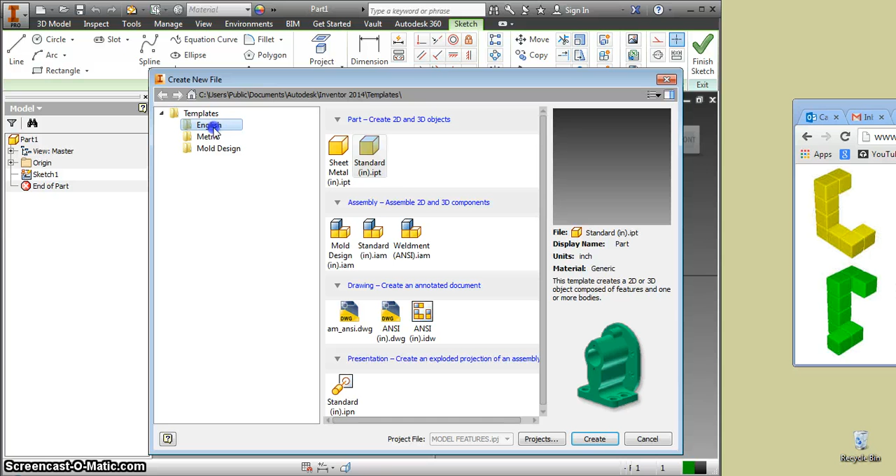So I'm going to show you how to create a more complex puzzle piece, such as this yellow one on the right hand side. So once again, we're using English and standard, and we're going to create that part.

We want to start with our 2D sketch, and we're still going to use our XY plane. So let's create this part using rectangles.

I'm going to make this long L right here, and then I'm going to add on this bottom piece. So first I'm going to make the top of my L, and then add on that bottom part.

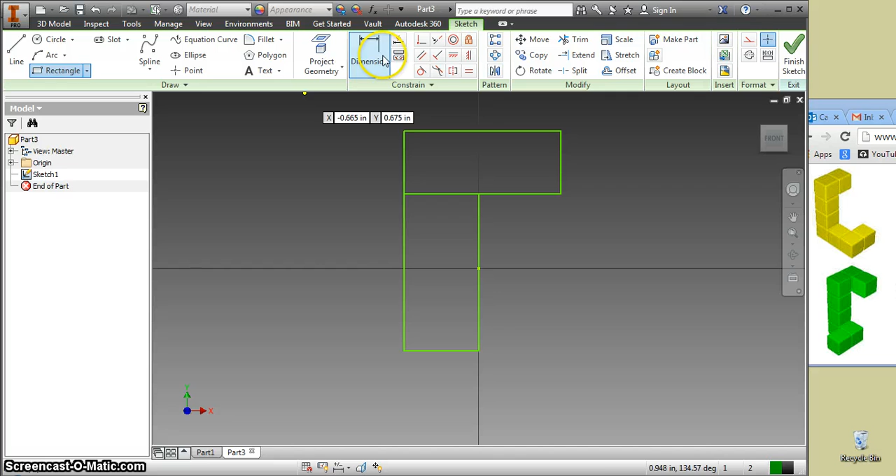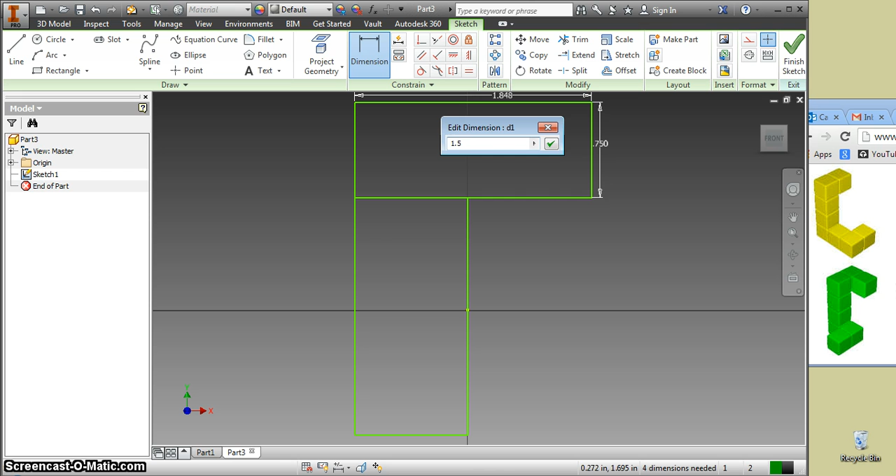I'm going to use my dimension tool. I know that this side of my L needs to be 0.75, and then I want to go back and zoom out. I know the top is 2 blocks long, so I'll click that and drag out, and that should be 1.5 or 0.75 plus 0.75.

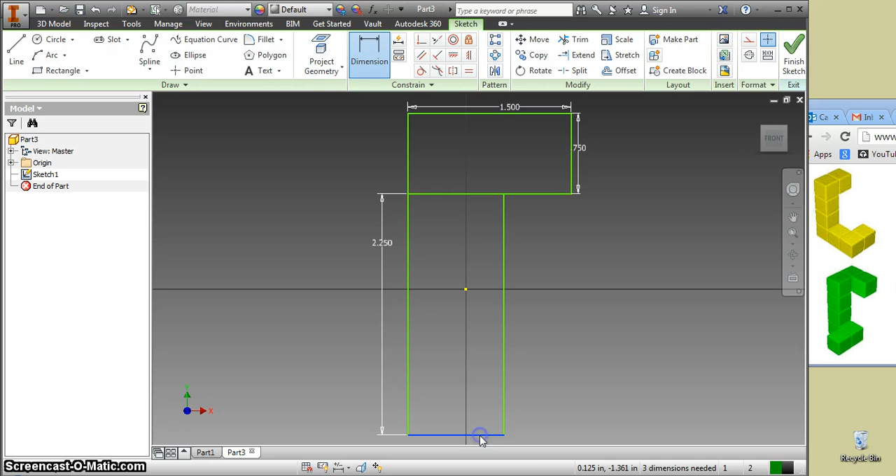Now I know that this is going to be 0.75, so that's going to be this one block. Then I have 1, 2, 3 blocks down, so this line should be 3 blocks, so 0.75 times 3. And I know that this part of my block should be 0.75.

So this is going to be my initial L. I'm going to finish that sketch because I'm all dimensioned as much as I can right now. Zoom out. I'm going to extrude that, my 0.75 inches.

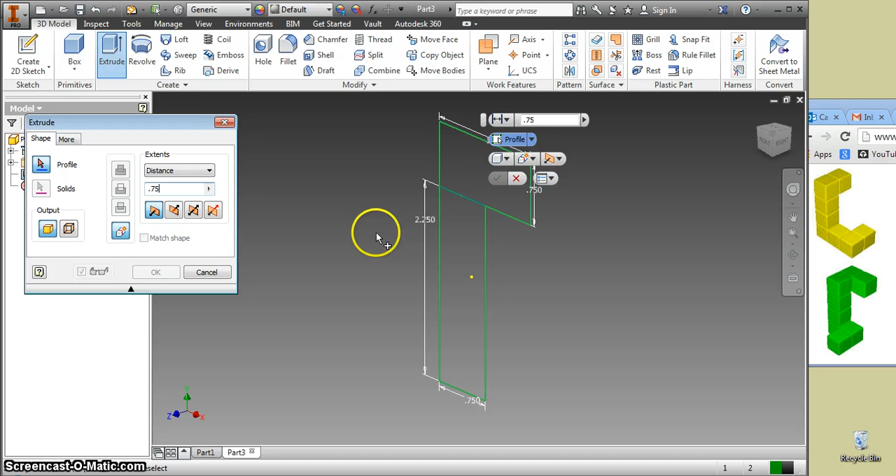And I want to extrude this and this. Once I have the front of this L, I can now add on this bottom part.

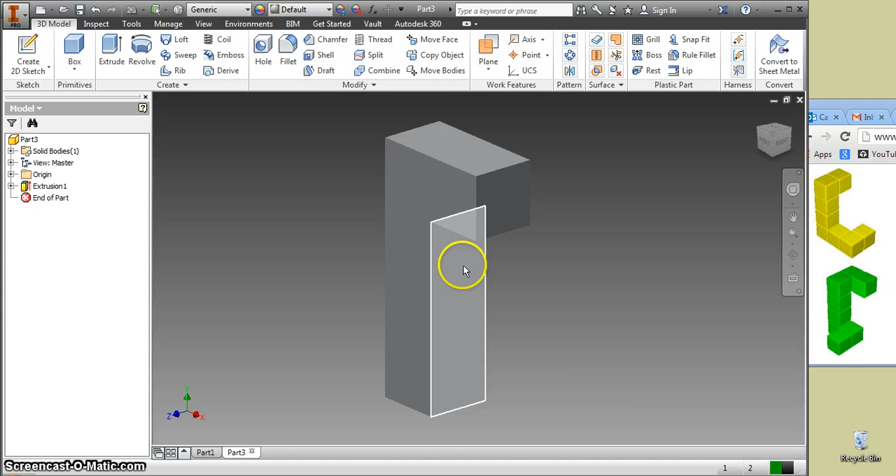So first, I can't add on it coming out in 2 different directions at the same time. So first I'm going to take these 2 front blocks, pull out one and then the other. And then after I have that, then I can add this third one on going the other way.

So first we're going to create that sketch on the front of here. We're going to make that rectangle go from this corner up, and I want to dimension it and make sure that the amount that it goes up is 0.75.

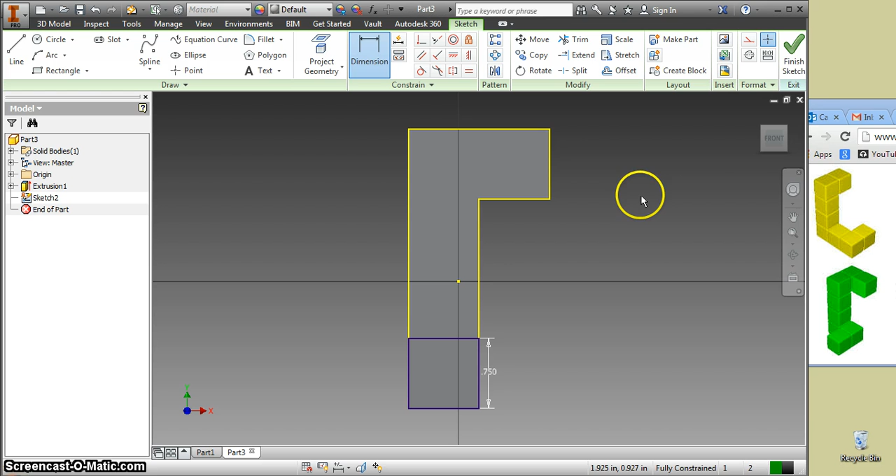And that's all I have to do so I can finish that sketch. And now I want to extrude this box, and I want to extrude it 0.75 plus 0.75. That's coming out to 2 blocks.

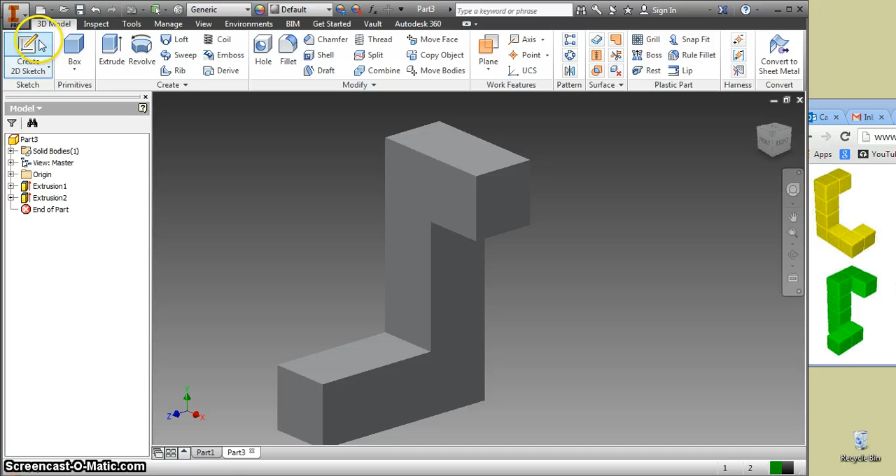And now I want this other block to come off towards me in that X direction. So I'm going to create another sketch on this portion, and I'm going to make another rectangle, and that's going to be dimensioned as 0.75 and 0.75.

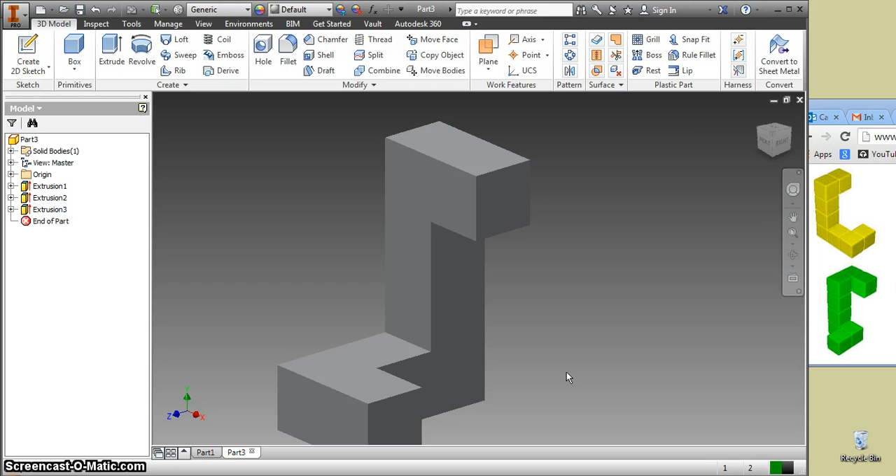I can finish that sketch and extrude this box. I only want it to come out 1 box, so just 0.75. And there we go, I have my complex puzzle part.

If I want to change the color, I can go up here and maybe I want to make this one cyan. So I have a blue puzzle part that looks just like this one.

Let's see if we have another complex part that we can make. All of these parts are made in the same way. So let's try to make this complex puzzle part.

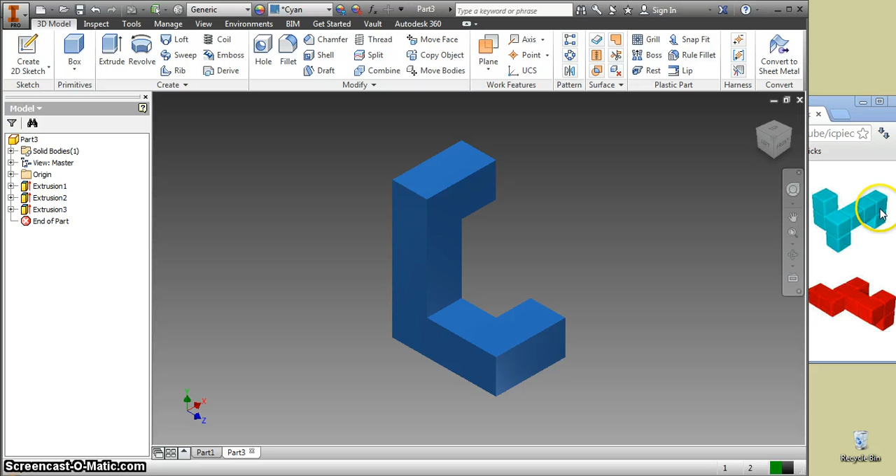So we'll do new, standard in English, create, and I'm going to make that 2D sketch on my front plane. I'll do this one with lines.

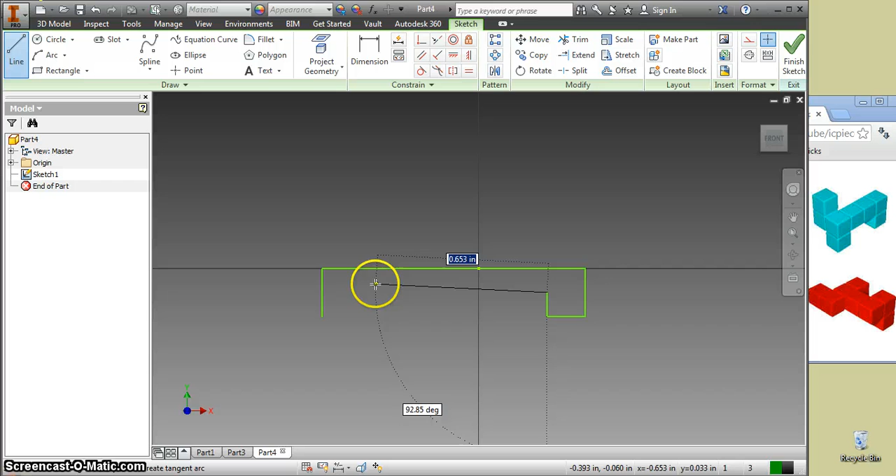So first I'm going to make this kind of upside down U. So I'll click and make sure my lines are all straight. And it doesn't matter that it looks a little crazy now because I can use my dimension tool.

I know that this should be 0.75. So should this one. The inside of it is 2 blocks long, so that will be 0.75 times 2.

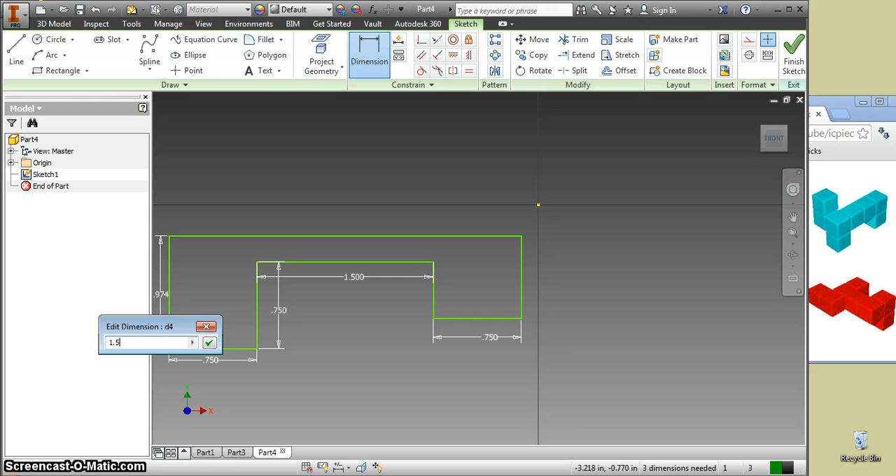And this inside will be 0.75. This outside is 2 blocks. And this one will be dimensioned already.

So now all of my dimensions are in my sketch. I can finish that. And I can extrude this. I want it to go 0.75.

And now I see that this one is coming out on the back. It's coming off of this front corner one, coming off one and then up.

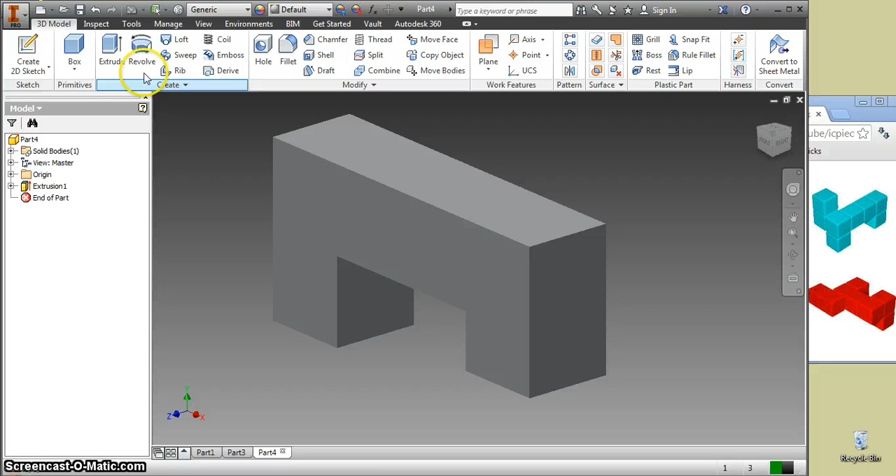So I can create a sketch on this portion, and I'll make my rectangle. So I can tell that something went wrong here, because if we look front on, this one is shorter than this one. So let's go back.

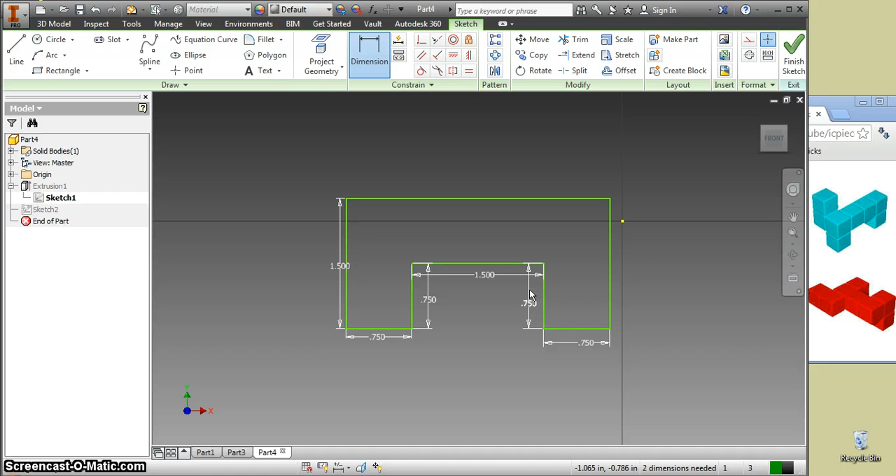If you want to ever change something, click this little plus on the left of your extrusion, and this is my sketch. So the one thing that I didn't mention here is this little leg. So now if I finish it, it will fix itself.

Now I can go back to this sketch that I was going to create, and I can make my rectangle in the corner up here. Finish that and extrude just that portion out, 0.75.

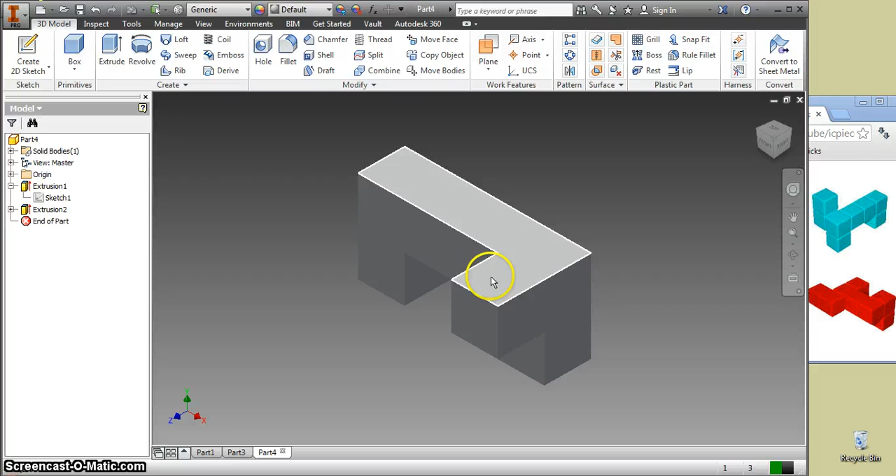And then I want to make this block go up off of here, so I can make another sketch on the top with a rectangle. And you can tell that they're both 0.75. Finish that up and extrude it up.

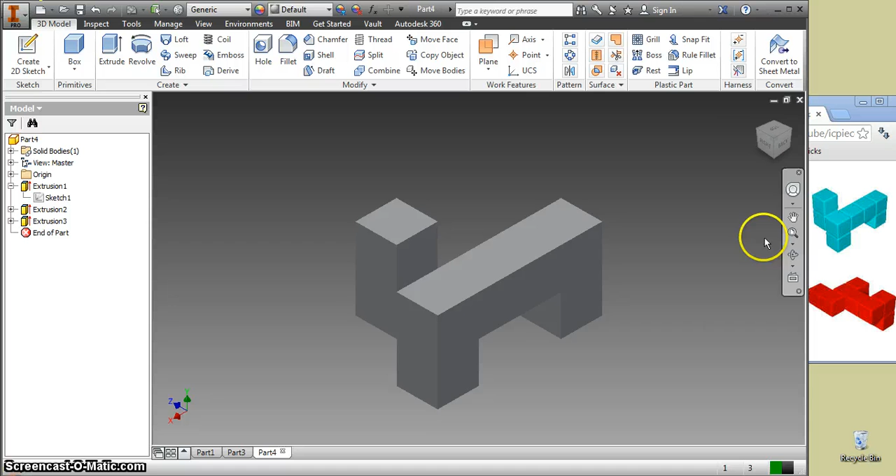Now we can see that my shape matches up, and if I want to change the color, I can make it whatever I want.

So all you have to just remember with Inventor is to break your piece up into different steps. So you're never going to be able to go out in a million dimensions at once. You need to figure out which is the easiest way.

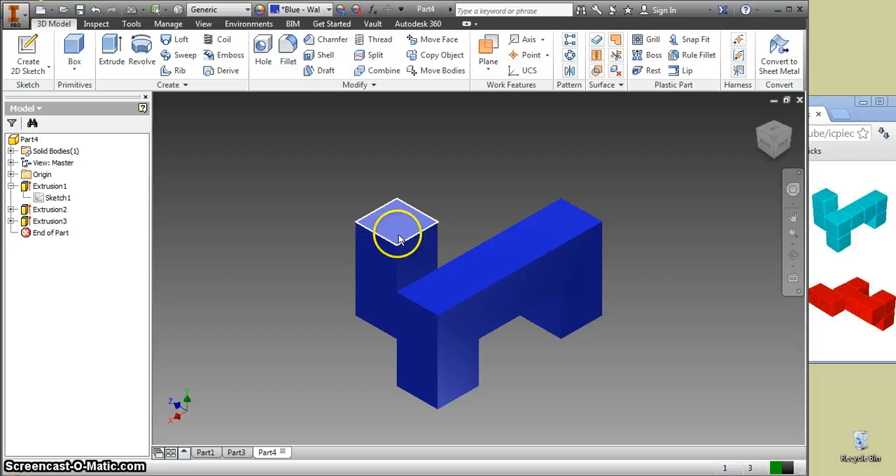I could also have made a Z shape like this, extruded it out 0.75, and then added on this L off the back. So there's a bunch of different ways that you can go about making these puzzle pieces, but the more you do it, the easier it will be for you to figure out which way will be the easiest to create your piece.